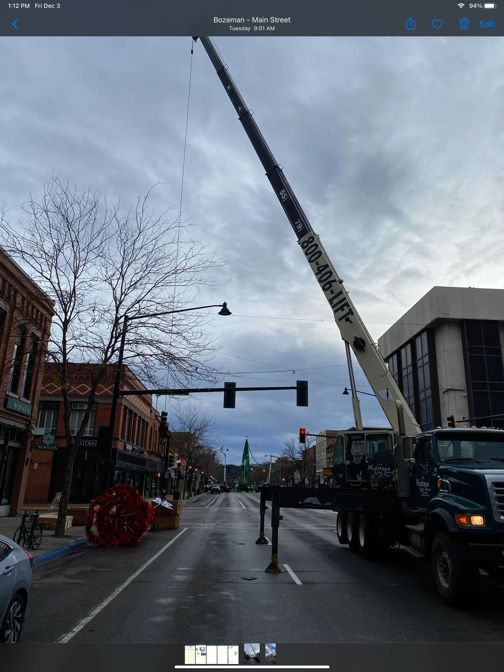Second to last Friday, right? Homework is due today. Quiz, you haven't. I mean, you had the option. There's no way you got it done, okay? But it is open now, and it's open now until the end of Sunday. Okay, that is quiz number 9. We will have quiz number 10 and homework number 10. I will assign that probably this weekend. Not exactly sure when it's going to be due.

What would you rather have? Okay, I'll open this up. We'll make it democratic here. Okay, we will have a quiz and a homework. We have an exam on Wednesday. Would you want the homework due on Monday and the quiz due up until our final, like the day of the final? Or would you rather have the homework due, say, Friday, and then same thing, quiz is due by Sunday, the weekend before our finals?

How valuable is having the solutions to that homework to our final? It's going to be valuable. It's going to be over pressure vessels and combined loading, which essentially is just everything that we've talked about so far in this class. Might as well just keep it the same. Yeah, I would keep it. Okay, same it is. See, look at that. Give a little, kind of, sort of.

Quiz drop? What? Did you hear that? No, but

I have teacher evaluations. Okay, they used to go around with an envelope, which made sure that everyone would fill the thing out. Now it's online, so to incentivize you guys to talk about me, I would like to offer an opportunity, okay? If we get 75% of the class to go out there and fill this out, okay? And I'll put a link on D2L so you guys can go out and find it, okay? Maybe you guys already know where those are. Maybe you've already gotten emails. I think they're already available. But if we get 75%, I'll add 3 extra credit points to the final, okay? That's 3% to the final. Seem fair? Okay, so go out there.

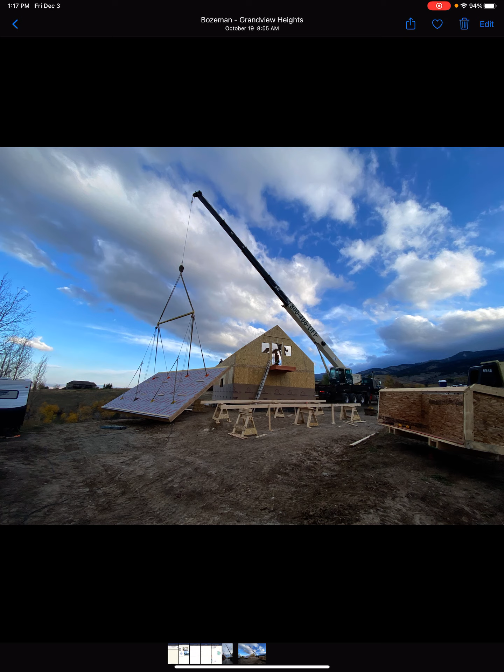Here's another one, a dump truck going down 19th, and the dump truck bed came up and grabbed one of the light poles, swung it around. That light pole now had bending, axial load, and torsion, but unfortunately not enough capacity. The dump truck just took that thing right out.

In a windstorm, you've probably seen them swaying. Well, those are deflections. We'd have to have allowable deflections. We wouldn't want that thing to move like 5 or 6 feet.

So all of those things come together and culminate in engineering design. That's what chapter 15 is about, essentially taking all the pieces of this class and putting it together, so that you, when you're standing out in the real world looking at something downtown.

Buildings, signs, vehicles, all of those things - there's tons of different load sources. Hopefully after this class you have 95% of the tools to analyze pretty much everything, which is really cool. You can figure out what stresses are in things, knowing material properties. You can figure out what things can and can't handle, and when it's going to break.

As civils, we rely heavily on the idea that we deal with big, really expensive stuff, like this building for instance. You're not going to build a building and then test it to make sure it's safe enough for people to be in it. Mechanicals have the advantage.

I had a friend that worked for Lexmark. If they wanted to change a component in a printer, they'd just go manufacture a new component and try it out - costs a few dollars, a few hours of people's time. In a building, you can't really prototype like that, so that's where design becomes very, very critical.

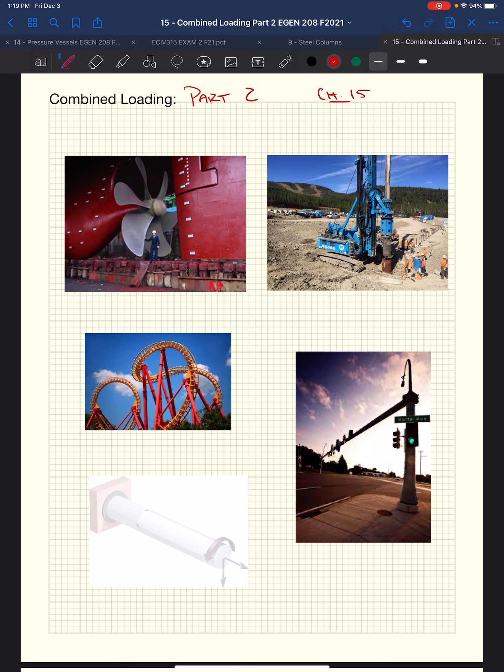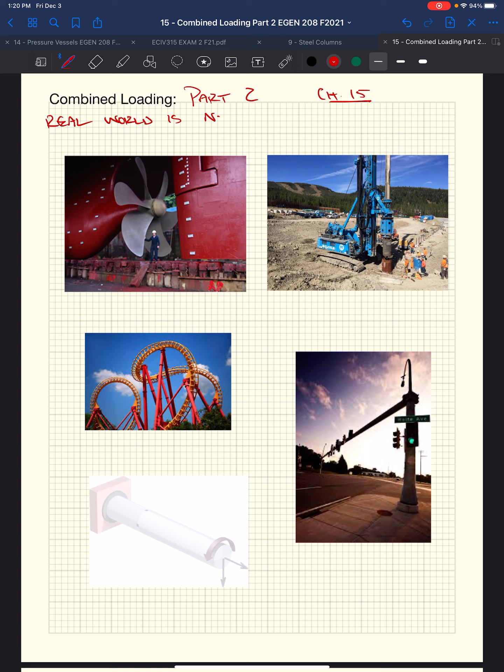Also, as I mentioned, the real world is not simple. All those little trusses or individual cylindrical tubes or pipes that we had cantilevered off a wall with one single load on them - the simplicity of a lot of the problems we've been dealing with up till now doesn't happen as often. We've got a lot of combined loading that happens in the real world.

Our initial combined loading exercises - I had a couple examples of a propeller, where the shaft would be induced with axial and torsion: axial thrusting the vessel forward, and torsion driving the shaft itself. That's for the METs, and for you CETs...

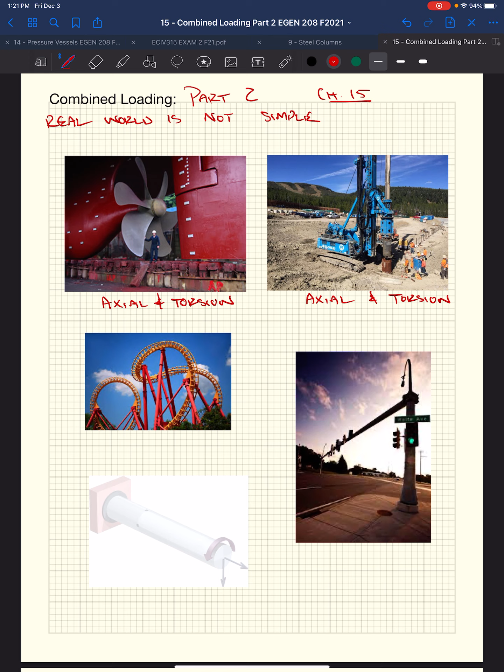Drill rig - this was up in Spanish Peaks. Talked about that, which I was up there recently. Massive, massive building, huge cranes. Go drive up there, seriously, if you're in Big Sky. It's all public, open to the public, all the roads are. They have really good mountain biking trails too, in the summer. They're all public too. Check it out. Roller coasters.

Well, we got all types of stuff going on - bending, torsion, axial. Talked about our street light: we've got the axial weight, the weight of all that stuff hanging out there has to come back as an axial load acting on the column or post. We've got a moment acting at the top of our post due to the cantilevered member out there carrying all the street lights. And then, as mentioned, in wind or unrealistic scenarios like a dump truck running into it, we'd have some torsional demands as well.

So we have axial plus torsion plus bending. These are our axial loads, torsion, and bending.

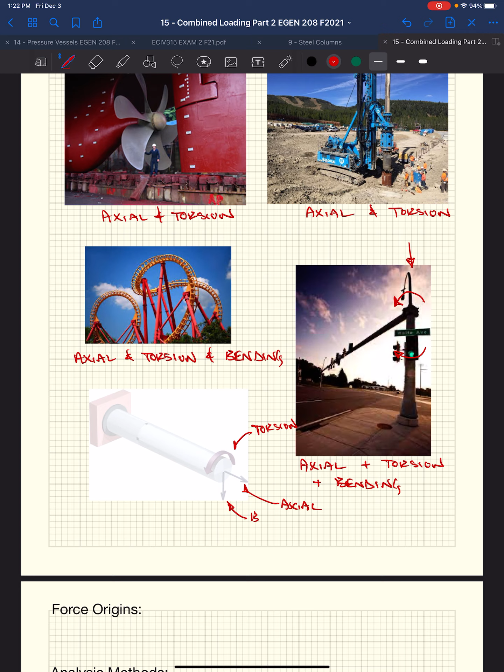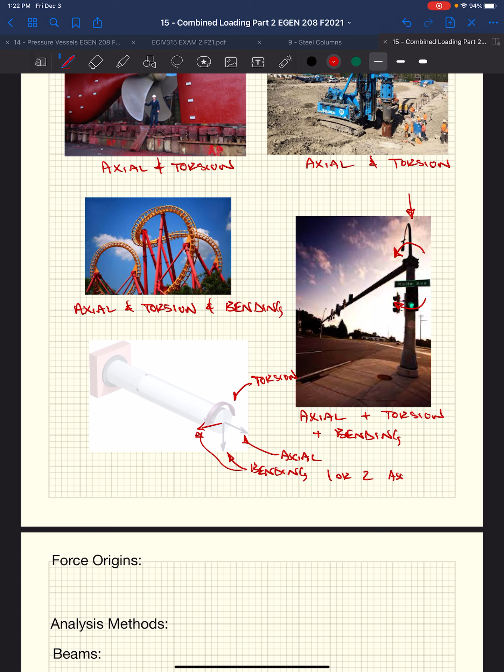We can have bending in multiple - one or two axis bending, right? We can have forces acting in two directions on the end of something.

And we can also have pressure. I mean, you can't really see it, but these are all radiators - if you go to the basement of Roberts Hall, we've got to transport all of this high pressure steam around the entire campus. So that pipework has to carry its own self-weight, snaking its way through all the buildings, through all the utilidors that run underground between all the buildings on campus.

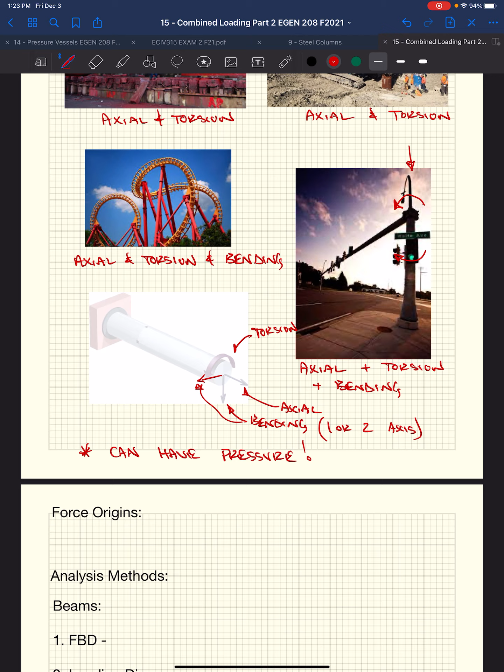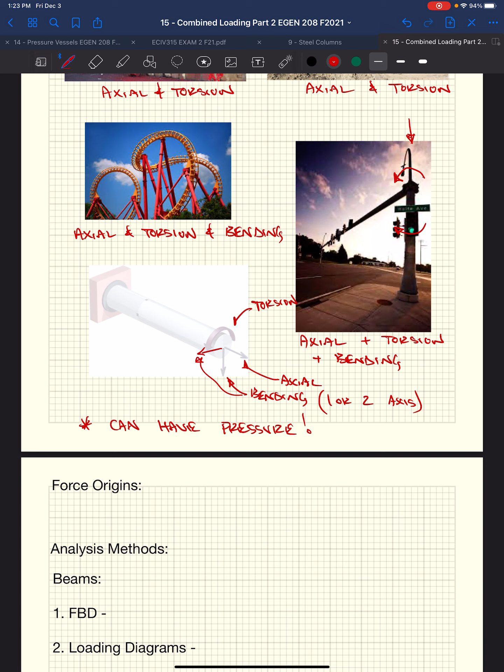So at times we've got axial, bending, and pressure or torsion - all of those load sources potentially acting at once. So if we look at these force origins: axial, torsion, bending, pressure.

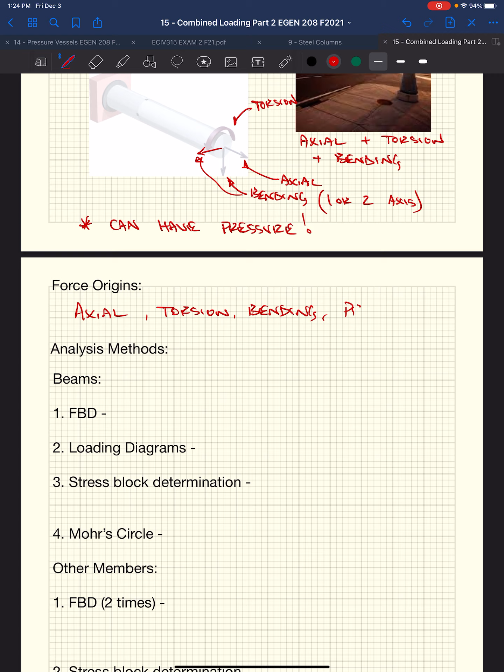We have some analysis methods. We usually divide them into two groups: one is if we're dealing with beams, because they're kind of special and out by themselves. If we're dealing with just strictly beams, we would start by doing a free body diagram - we do that with any sort of engineering analysis when we're talking about deriving forces and stresses. So we do a free body diagram because we want to find reactions.

Once we have a free body diagram established, we know what our reactions are, then we can figure out what our loading diagrams are, or more specifically, our internal shear and moments. Once we know what our internal forces are, our shear and moments in our beam, we can then jump to figuring out what our stress block looks like. We're going to calculate stresses.

Stresses on our block based on our loads and geometry.

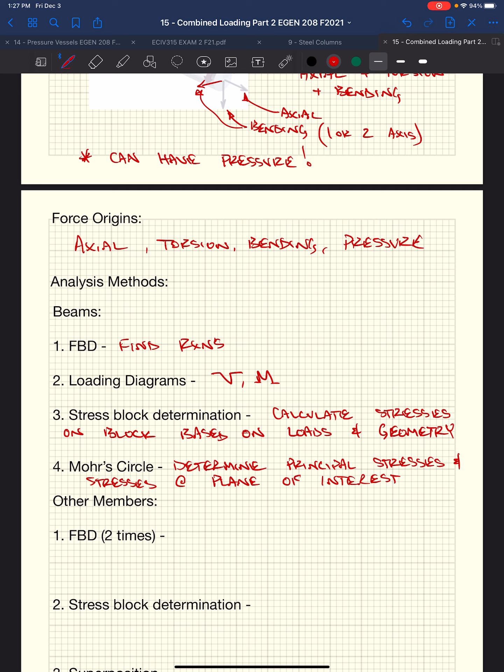In beams we might have axial loads also, but same sort of derivation. We figure out what our reactions are. We could have an axial load in our beam. If we have an axial load, we would calculate stresses based on force over an area, normal stresses. We've done that already. We can figure out our stresses on a stress block, and then we would determine our Mohr's circle, and we could figure out the stresses at any orientation. So that's beams.

If we look at other, more involved members that have a lot more going on, again we would start with our free body diagram. And I say two times - what we do is we break our element into two force systems. This will make sense when we go through the example.

But we're going to start looking at forces and moments. This is really just a housekeeping exercise in order to keep all of the stresses and forces organized. So there's no confusion - we don't add something when we're not supposed to, or subtract something when we're not supposed to.

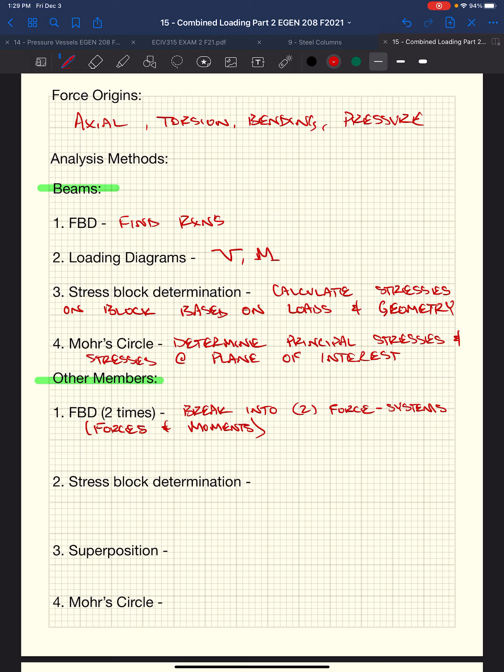Essentially, let's just go to it - this is going to be an example that we go through. We had a pipe hanging off of a wall, and it had these two forces applied to it. If we looked at the stresses here at the wall, the vertical force is going to be trying to bend or cantilever this pipe off the wall. And this force is going to want to twist this pipe at the wall as well as bend it at the wall. And if this pipe had, say, an axial load on it, those bending stresses and axial loads are going to be acting in the same direction.

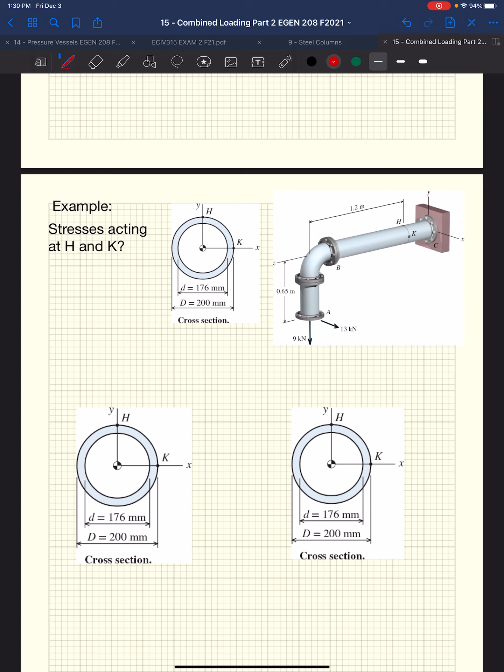So in order to keep the housekeeping organized, we essentially determine what the forces and moments applied are due to these applied forces at the point of interest, and then we separate them. We look at what forces are acting at this section, and what moments are acting at this section. We'll run through and figure out what stresses those forces and moments create, and then at the very end we go back and add them together.

So we do a free body diagram. We essentially do it twice. We figure out what these force systems are, what are the forces and moments, which means we have two sketches - one with force, one with moment.

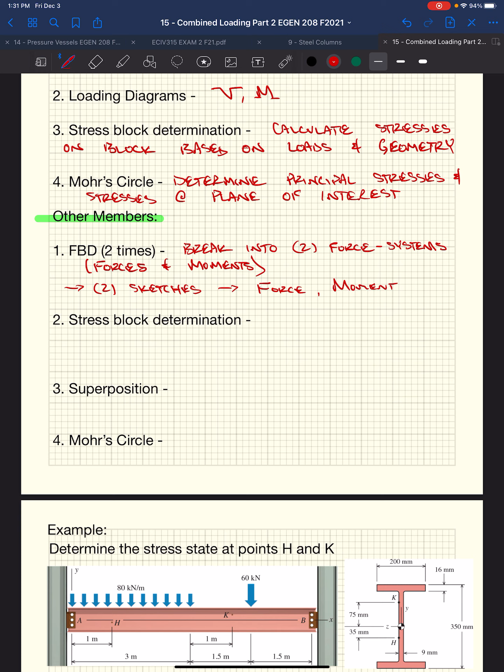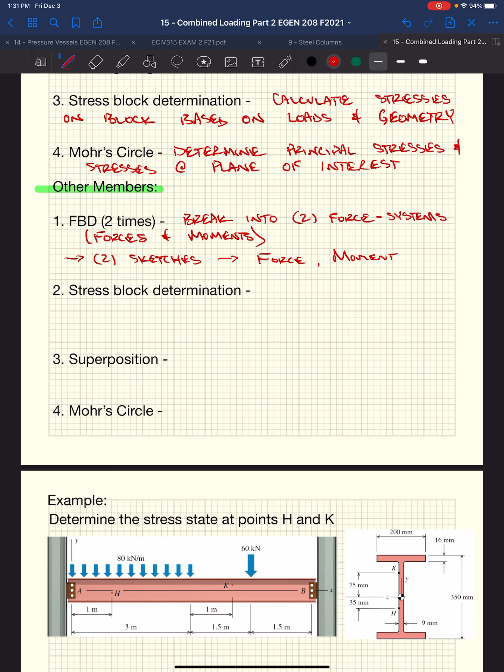From there, in each of those two stresses, those free body diagrams, we're going to have forces which create stresses, and we're going to have moments that create stresses. And so we're going to develop our stress blocks.

And we do that. We determine all stresses due to forces and moments. Pressure too. I'm trying to make sure we don't forget pressure because it can be there.

Okay, so based on those forces and moments, if it's an axial force, we're going to have axial stress. Axial stress is in the axis of our member. If we have bending in that member, we're also going to have bending stresses that are in the same direction. So we're going to develop what are the stresses due to the forces, what are the stresses due to the moments, and then we can add them together on a single stress block.

This is where we get into superposition, right? So we're going to add stresses at point of interest to determine the complete stress state. In other words, we're going to develop the complete stress block.

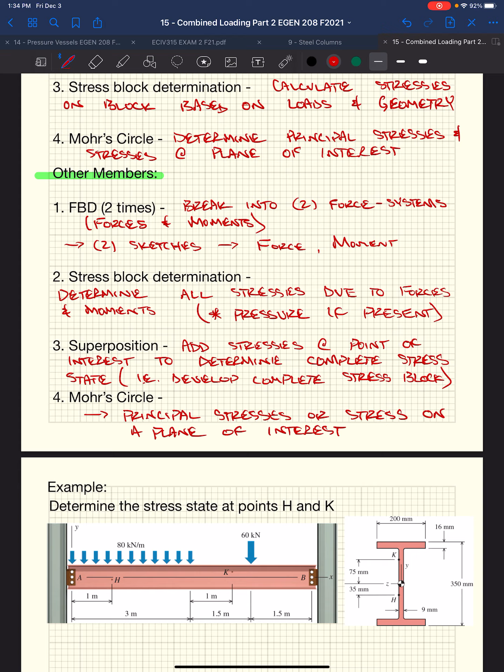Big thing here is we as designers and engineers also get to pick where we want to know what the stresses are. We always say in these procedures: we are figuring out, calculate stresses on a block based on the loads and geometry, or break into two force systems, determine all stresses due to forces and moments. Well, these stresses that we determine are at a location of interest.

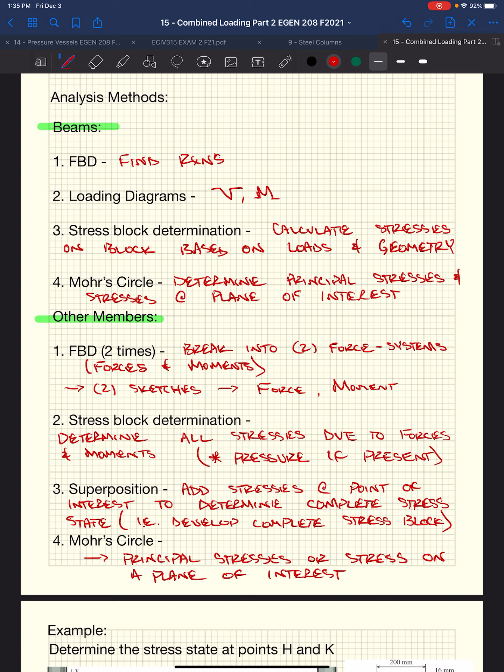And in all these homework problems, the quiz problems, all of that, I've given that to you. Well, in the real world, that's where you have to look at something and determine where am I going to analyze this? Where do I think the maximum stresses are? What are critical locations along my member or element that I'm designing? So that's on us as designers to do. And then we can figure out what's the maximum at those locations. But picking one location does not mean it's the maximum throughout the entire beam.

So in this example, we're going to look at a beam element. It's got a couple different load sources. It's got a uniform load, constant magnitude over partial length, half the length. And then we got a point load that's sitting at a quarter point from the right end. And they're asking us for what is the stress state at points H and K.

H and K, more specifically, are at certain locations along the cross section. So we have the longitudinal location of our points, H and K. H is 1 meter from the left end, K is 4 meters from the left end. And then on top of that, H is 35 millimeters from the centerline, or the centroid of our I-shape, and K is 75 millimeters above the centroid of our I-shape.

But as you guys will learn when you get into actual practice, figuring out H and K and where those are is up to us. We have to decide that, okay? Or we get a computer program that just looks at the entire beam all at once. Seems like the easiest approach. That's what I do. But to have an understanding of it is critical.

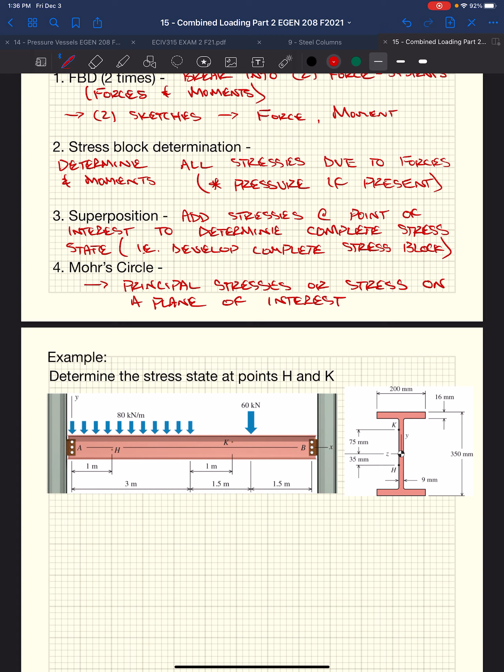So in this case, we're going to look at a beam. We're going to look at two points, H and K. We're going to look at those H and K being H, as I mentioned, 35 millimeters down from the centroid, and K being 75 millimeters up.

Well, if we go back to our procedure or analysis method here for beams, we're going to do a free body diagram. We're going to figure out our load diagrams. We want our internal forces, notably at our points of interest. From that, we can figure out our stresses, and we can put those stresses on a stress block oriented with respect to our points of interest.

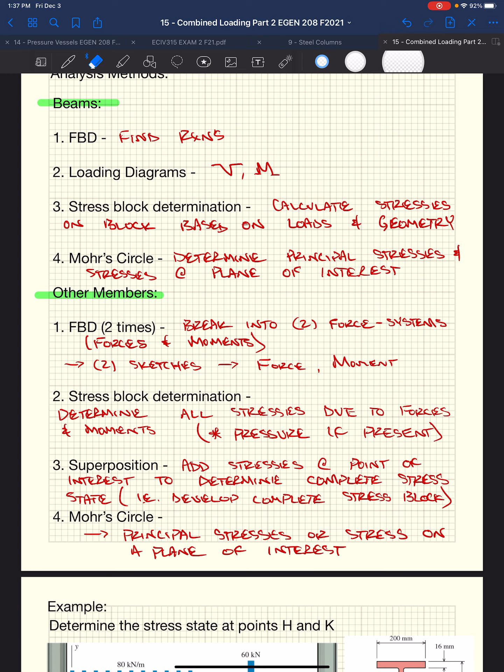And then finally, we could figure out what the principal stresses are, what the maximum shear stresses are. If in this beam we decided that we had a beam that was 5 meters long and 1 meter long, and we decided to weld the thing together at H, and even more so, we had two members that were at a 45-degree angle, we decided to weld them at a 45-degree angle.

So we could use Mohr's circle once we know what the stress state is at H. Our stress block is at H. We could devise a Mohr's circle for that at H. Knowing the orientation of that weld line, we could figure out what are the stresses in the weld, and we could size what the weld needs to be. Are you using 70-18 rod or are you using 70-16 rod? What are you using?

60-14 rod? What are you going to use, right? So,

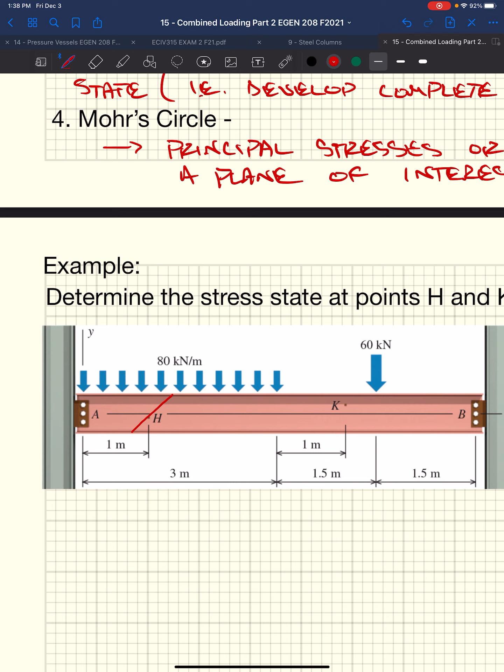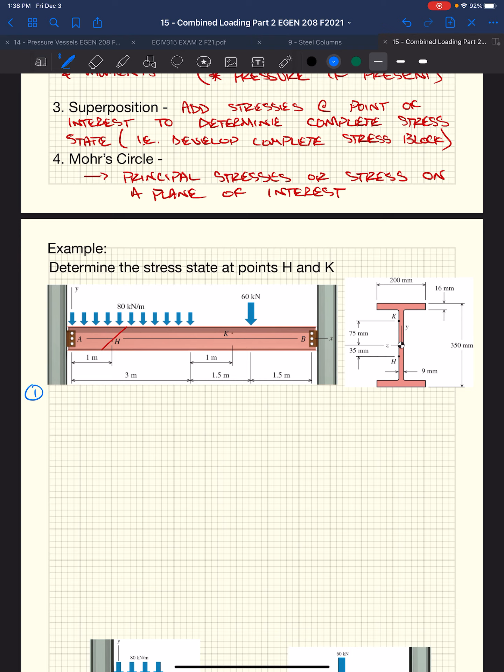If we work our way through this and we start at step 1. Step 1 is our free body diagram. I'm going to piggyback on this sketch and say this is my free body diagram. I don't want to draw this out, okay?

Coordinates, always have to have coordinates for a free body diagram. I have to indicate our external applied forces. We also have to indicate our reactions. In this case, at A and B, as we have mentioned before, we have what we would call pinned connections.

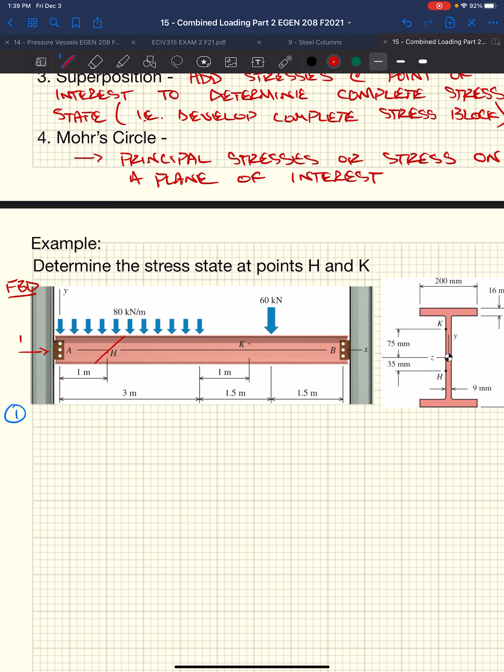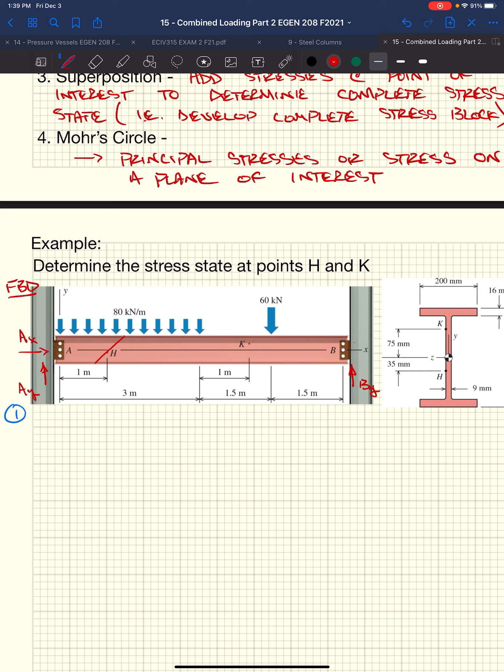And we have 3 equations of equilibrium, right? Well, we're gonna call this a roller. B is a roller, A is a pin, okay? 3 equations of equilibrium, 3 unknowns. This is a determinate system. We've got sum of the forces in the X, sum of the forces in the Y, and sum of the moments.

That gives us AX equal to 0, right? If we sum forces in the X, there's only one force in the X direction. No externally applied forces, so we get 0.

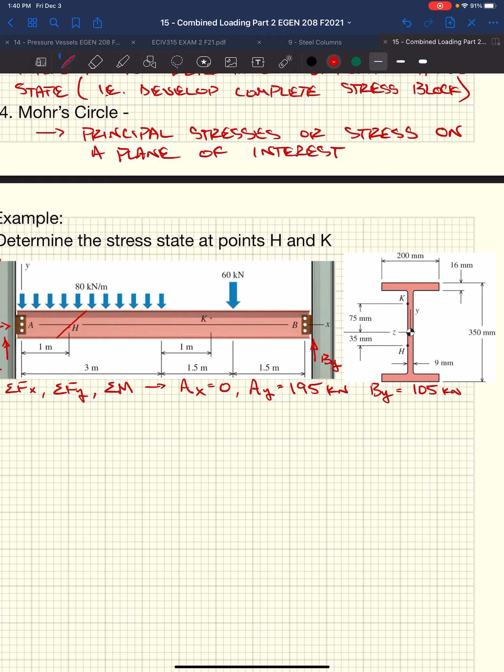AY, well, if we sum forces in the Y and sum the moments, we're going to get that AY is 195 kilonewtons and BY is 105 kilonewtons, right?

Which intuitively would make sense to me, stepping back after this. AY—there's more force applied on the left-hand side of the beam than there is on the right-hand side of the beam, right? And so AY should be greater than BY, okay?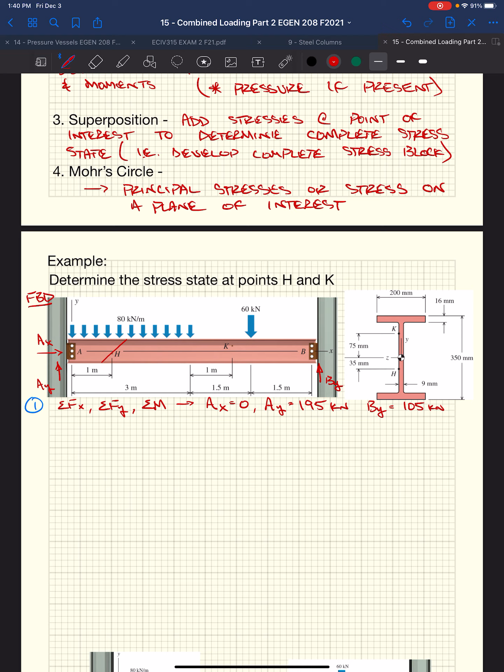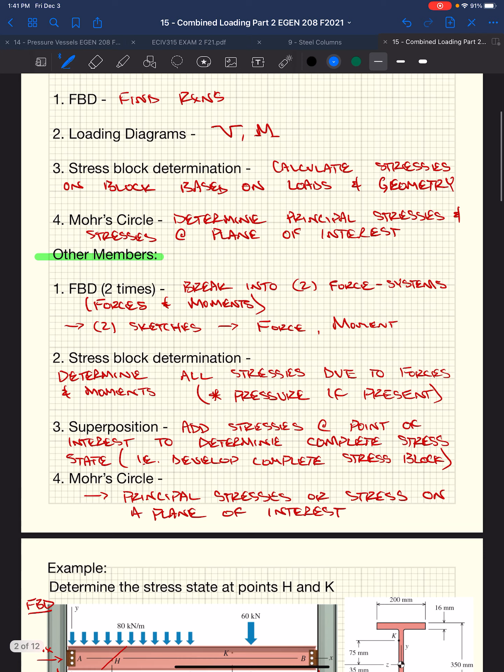Now we can jump to step 2. Step 2 was our internal forces, or our force diagrams, right? Loading diagrams, our shear and our moment diagrams. You guys have had quite a bit of practice with these by now.

We looked at our shear diagram and we drew a moment diagram. Shear diagram is dependent on externally applied forces, right? So if we start on the left-hand side of the beam, we know AY is 195 kilonewtons, acting upward, right?

Nice. Is that one of those little electric scooters? No, it was just a motor bicycle. Or sorry, that's just a bicycle? Yeah, it was just a bicycle with little... one of those little 20... Really? Like yeah, a little, it looks more like a weed eater motor? Yeah, exactly.

Nice. So we got 195 kilonewtons, right? That changes our shear diagram. We jump upward to 195 kilonewtons. I'm going to move this dot over to here.

Thank you. The shear diagram changes with respect to externally applied loads, right? So if our uniform load is constant, then our change in our shear diagram is linear, right? And it's going to be linear until that load stops, right? Which is the center line of our beam. And it's going to change at a rate, right? The slope of our shear diagram is the magnitude of our externally applied load, right?

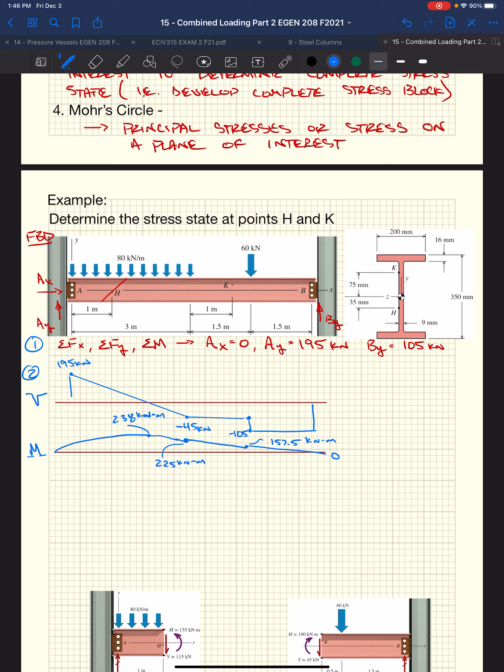This is 157.5. I don't know why I squished that like I did, but I did. So we start at 0. We gain non-linearly because our shear diagram is linear. We lose some non-linearly because our shear diagram is linear. Now our shear diagram is constant, so we're going to decrease at a linear rate. First at 45, then at 105, and we're back down to 0 because we have a pin-pin beam condition. So that's step 2.

So now we have internal forces. Well, I guess not quite done yet. We have points H and K. That's our points of interest. So we really want to know what our internal forces are at those 2 points. So if we drew a line right here and a line right here, we're going to have a corresponding shear and moment at those points.

Our shear is going to be 115 kilonewtons, and our moment is 155 kilonewton meters. Shear at point K is going to be negative 45, we're on that constant region of our shear diagram. And then if we ran the math and figured out what our moment was going to be, it's going to be 180 kilonewton meters at our point K.

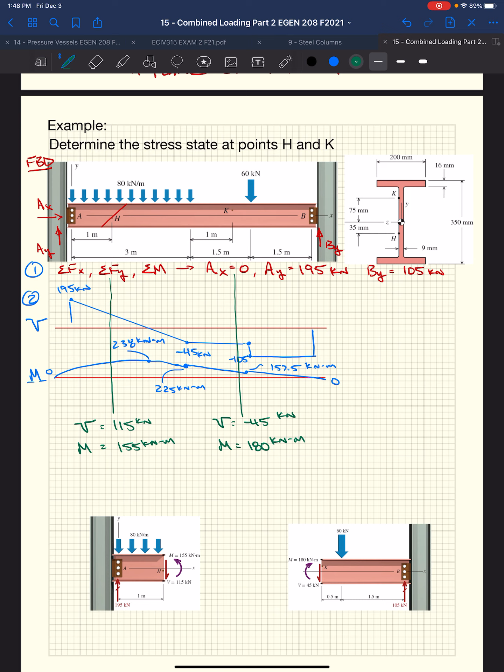So if we go back and we look at a free body diagram of our points of interest, if we cut our beam at H and K, this would be part - just call this part 3. This is point H. If we do a free body diagram at point H, those are our internal forces. Our shear is 115 kilonewtons. We know that it's a positive shear, up on the left, down on the right, so this is a positive shear. And we have a positive moment, 155 kilonewton meters.

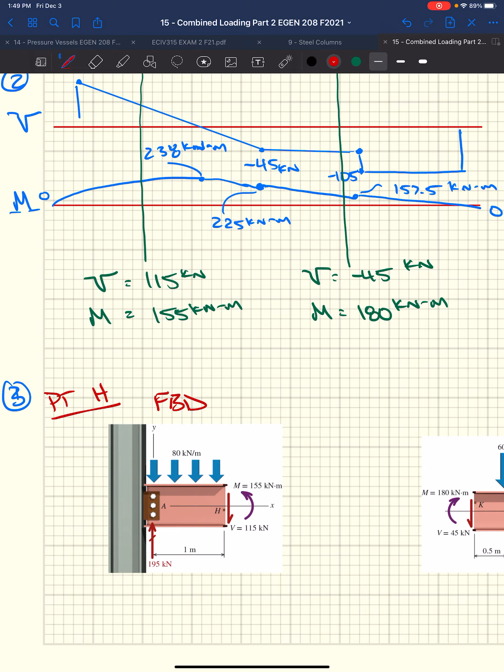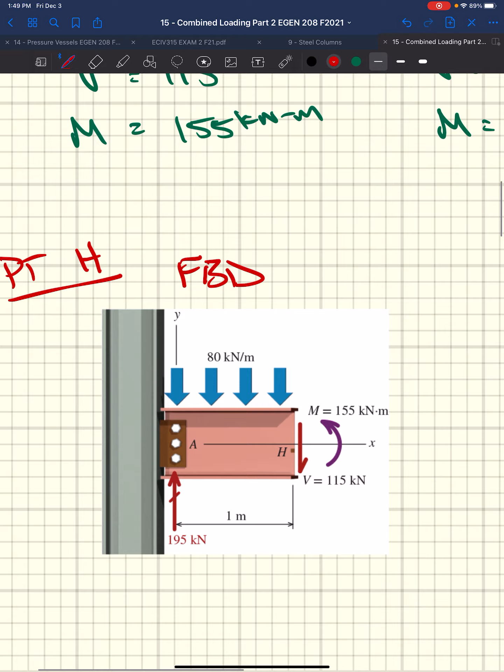We have our reaction at A, AY is 195, and then we have our applied load. At this point, at H, we've got this very small little square. This is our stress block. Well, at H, we've got not only a moment, but a shear, and we know that our moments give us normal stress, M Y over I - whoops, not what I wanted - tau is our VQ over I T.

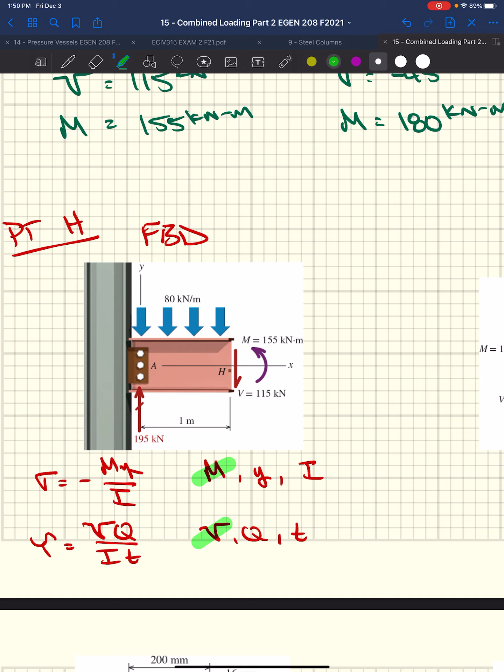Our unknowns here: M, Y, I, V, Q, T. Out of all of these 6 variables, we now have moment and shear. So we need to figure out the rest of them. What is I, what is Y, or I, Y, Q, and T.

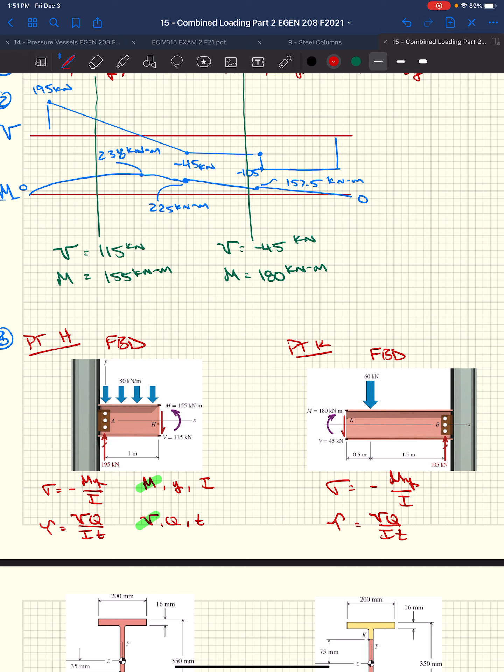Similarly, we're going to have to do the same exercise at point K. We've got this free body diagram. And again, negative M Y over I, tau equals VQ over IT. This is all similar exercises you guys have already done. If we look at point H, point K - point H, as I mentioned, was 35 millimeters down from the centroid of our I shape.

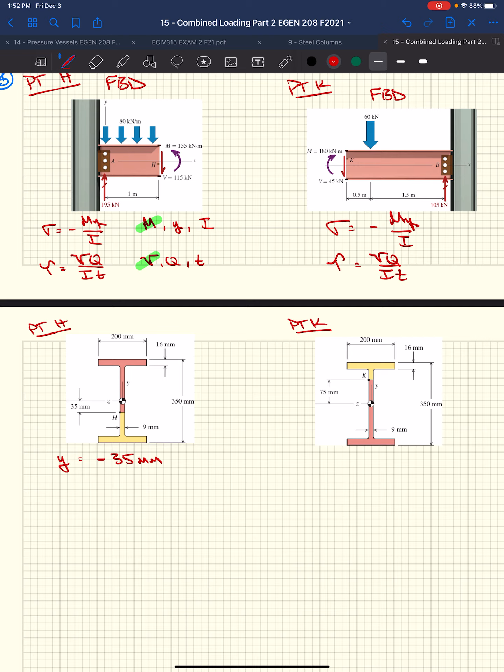So our Y, in this case, in our bending diagram or our bending stress equation, negative M Y over I - Y is the distance from the centroid to the point of interest, positive upward. So if it's positive upward, we're below the centroid, so we have negative 35 millimeters. If we look at Y for point K - did I even write it in? Yeah - Y for point K, we are 75 millimeters above the neutral axis, so we have a positive 75 millimeters. We also need to know what is our moment of inertia, IZ.

Well, I am going to break this thing up. We could find the moment of inertia of our top flange, moment of inertia of the bottom flange, and moment of inertia of the web. Knowing that the web's center is coincident with the centroid of the total section, you don't have to worry about the parallel axis theorem. With the flanges, though, the centroid of each is a distance away from the centroid of the total section, so we'd need to find the moment of inertia of the top flange and add to it the area times the distance of that flange's centroid to the centroid of the full section, squared. We'd essentially double that because we have a symmetric flange on the other side. So we could go about it that way.

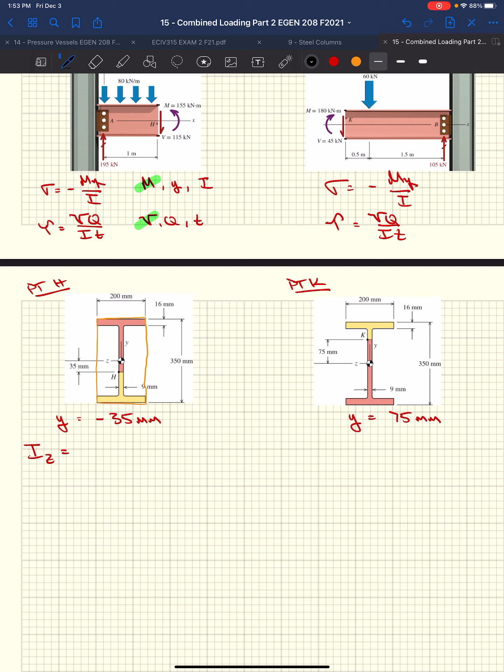How I'm going to go about it is I'm going to take the moment of inertia of the full section and then subtract out these two little rectangles. The reason why I do that is we know the moment of inertia of a rectangle is BH cubed over 12. The centroid of this rectangle is the same as these rectangles with respect to being along this axis, which is the axis we're trying to get our moment of inertia about. So if I took the moment of inertia of the whole rectangle and subtracted out the moment of inertia of these two inner rectangles that aren't there, we come up with the same answer as if I were to look at each of the three rectangles independently.

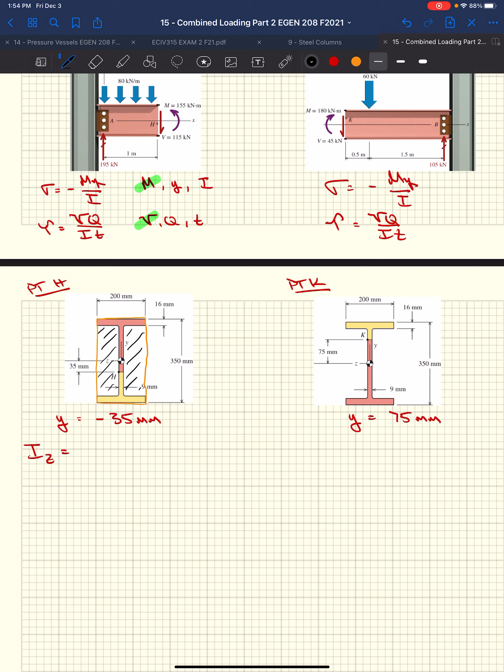Are we just ignoring the little fillets in the corners? Yes, because that's all they're giving us is the dimensions of our rectangles.

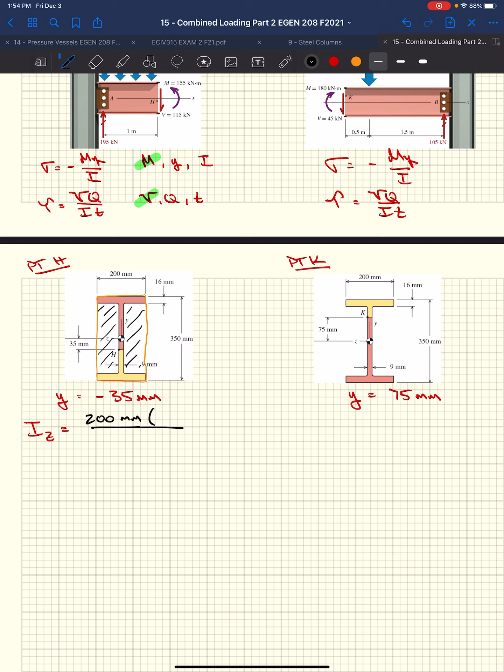So if that's the case, I'm going to start by saying we have 200 millimeters for B, or the width, times H. The whole depth is 350 millimeters over 12, minus those two inner ones. I'm going to say it's 191 times 318 cubed over 12. 191 is the total width of each of these - it'd be 200 minus 9, is 191, essentially the full width of the black hatched region. Height of it is 350 minus 32, or 318, cubed over 12. We get a moment of inertia of 202.7 times 10 to the 6th millimeters to the 4th.

And that is consistent, or what we would use for both of our points, in both of our equations, because the moment of inertia is the same throughout the cross section.

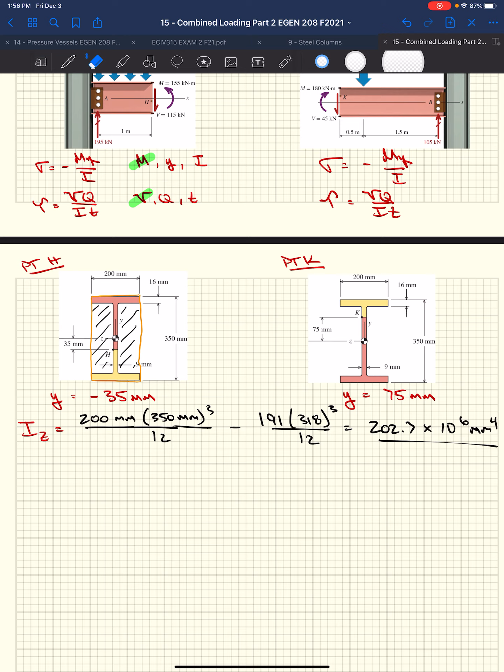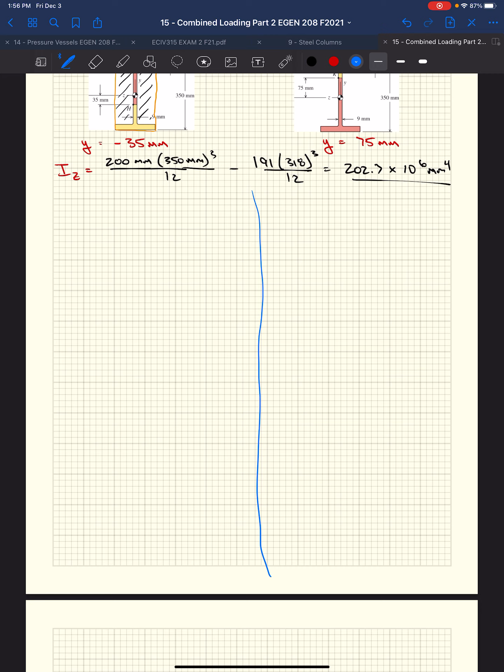So if we figure out now, we'll draw a line here. We're going to look at point H. The normal stress at point H, as we know, is negative My over I. Now we have y and I, so we can just plug everything in. The critical thing here being we need to make sure we have consistent units. We've got an I that's in millimeters, we have a y that's in millimeters, and we have a moment that's in kilonewton meters, so we need to convert that.

So we get sigma H equals the moment, 155 kilonewton meters. I'm going to change this into newtons per kilonewton, and change meters into millimeters. Y is negative 35 millimeters, and our moment of inertia is 202.7 times 10 to the 6th millimeters to the 4th. So the negatives cancel, and we get 26.8 megapascals, or newtons per millimeter squared. Positive, meaning it's in tension at point H in our cross section.

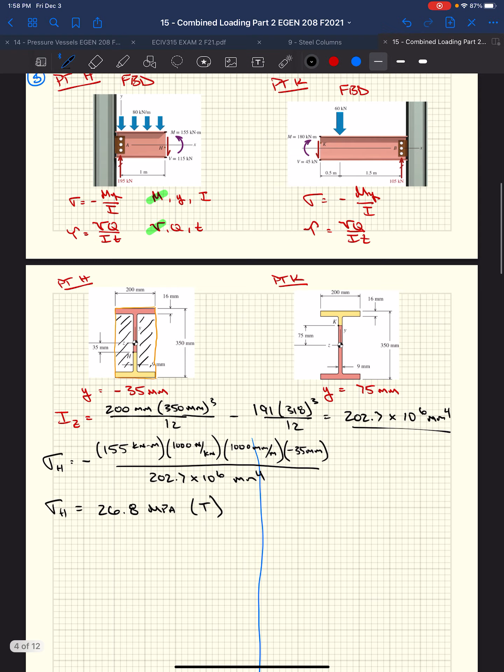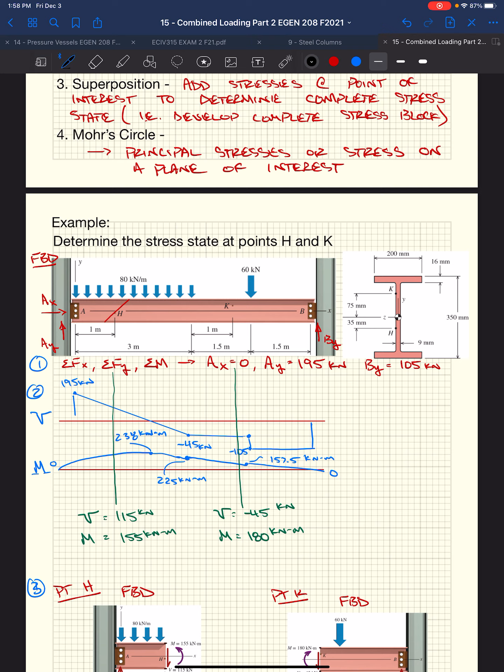Which makes sense. Positive bending - if this beam was going... I think everyone has some intuition at this point: if you have vertical forces sitting on a beam, the deflected shape is going to be downward, strain is going to be downward, it's going to have a positive bending moment in it. Positive bending moment means we're going to have compression in the top of the beam and tension in the bottom of the beam. So if H is below the neutral axis or the centroid, then we're going to have tension at point H.

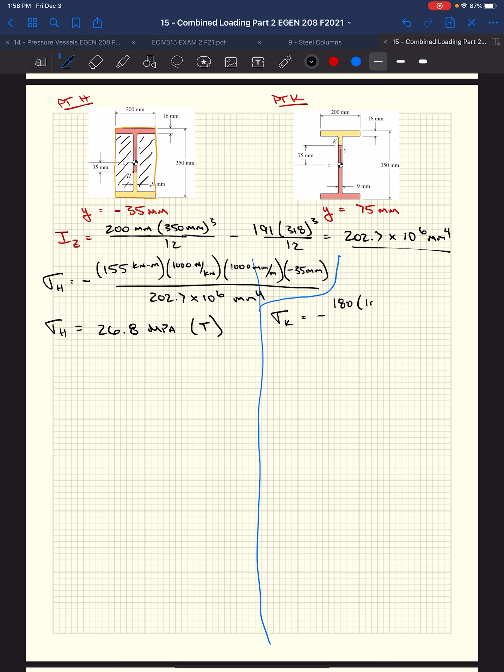So if we do stresses at point K, we get negative - I'm going to leave the units out so I can fit this in. Now we have 180 kilonewton meters multiplied by 1,000 newtons per kilonewton, 1,000 millimeters per meter, and we have a positive 75 millimeters as our Y, and then we have 202.7 times 10 to the 6th. We end up getting a sigma K equal to negative 66.6 - such a bad number - megapascals. Being superstitious, right, this isn't good. Let me just do this: negative 1.

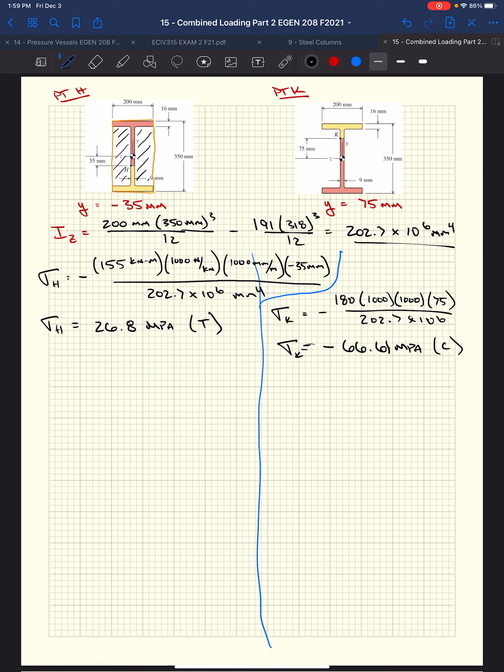Which intuitively makes sense - compression in the top of our beam, tension in the bottom. Those are our normal stresses due to the applied loads at those two points of interest.

We will continue on Monday with this example, and hopefully start another.